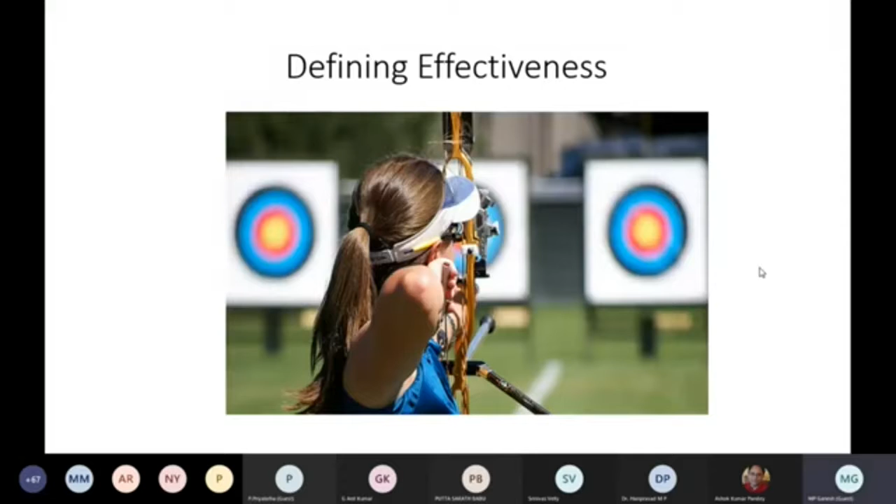Before we start, I would like to ask you a question: what is effectiveness and how is it different from efficiency? Like the picture says, effectiveness is achieving the right kind of goals, or achieving desired goals which are useful. Efficiency is achieving a goal with minimal effort, or the input-output ratio.

In this topic, we will first discuss under what conditions nonlinearity arises, and then discuss the methods used to solve such nonlinear problems. But before introducing those problems, I'll also talk about why we really need these solutions, since different types of methods are available. If time permits, I will also introduce some numerical methods that can be used for simulating these nonlinear systems.

I will show you how to obtain a frequency response of a Duffing oscillator, and demonstrate how to use Maple, MATLAB, and MatCont to get the frequency response of a Duffing oscillator. Then we will discuss the saddle node bifurcation in a microbeam, which is used for MEMS applications, and then discuss Hopf bifurcation, which is due to imperfection in the microbeam.

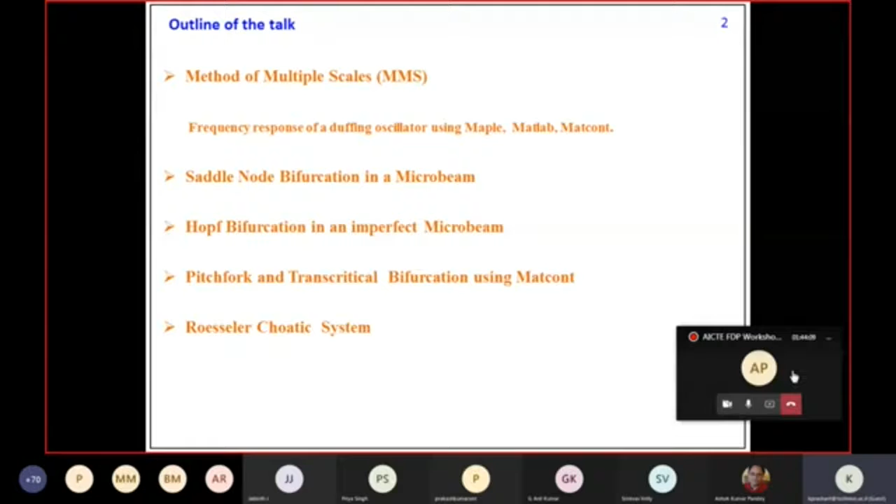And then we will see examples of pitchfork and transcritical bifurcation using MatCont. Finally, using phase plane, we will see the dynamic behavior of the Rossler chaotic system, and how it moves from a stable equilibrium to a chaotic system.

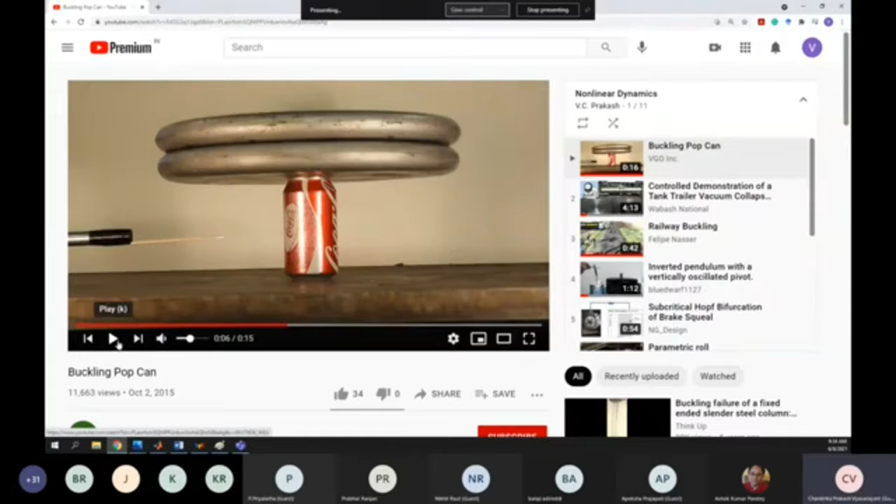So this is a Coca-Cola can, and what you see is that on top of it they have put a large amount of weight. Nothing is going to happen as of now, and the can seems to successfully bear the weight without collapsing. As I play the video, you see what is happening: someone is now probing it, meaning they are just going to touch it. It has collapsed with such a small disturbance.

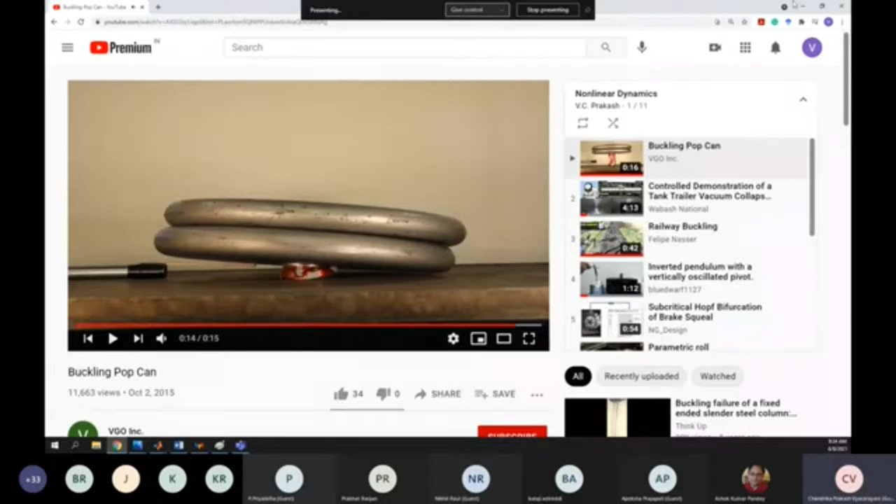So given that we have seen this video, let's approach this problem and try to understand how differential equations come into picture when studying mechanical systems.

I wanted to share some of my understanding on stability theory, perturbation theory, and nonlinear dynamics with all of you. Ashok told me a few days ago to speak on stability theory and applications of nonlinear dynamics and other things in fluid mechanics—how do we encounter it, and how do we solve those problems?

It's a beautiful subject, fluid mechanics, and it is beautiful—I use the word very carefully. It is beautiful not only from its appealing mathematical and physical side, but it's actually very beautiful to look at. I hope to share that passion that I have for the subject with you.

I have segregated my talks into three main topics. The first topic would be on stability and bifurcations. We will start with some very basic things. As I understand, most of you are aware of these things, but there are some nitty-gritties I might point out so we have a better launch pad for going to bifurcation theory and center manifold reduction. And some of the typical bifurcations, some mechanical system examples where these bifurcations are observed, and what are the mathematical characteristics of bifurcation, we will talk about.

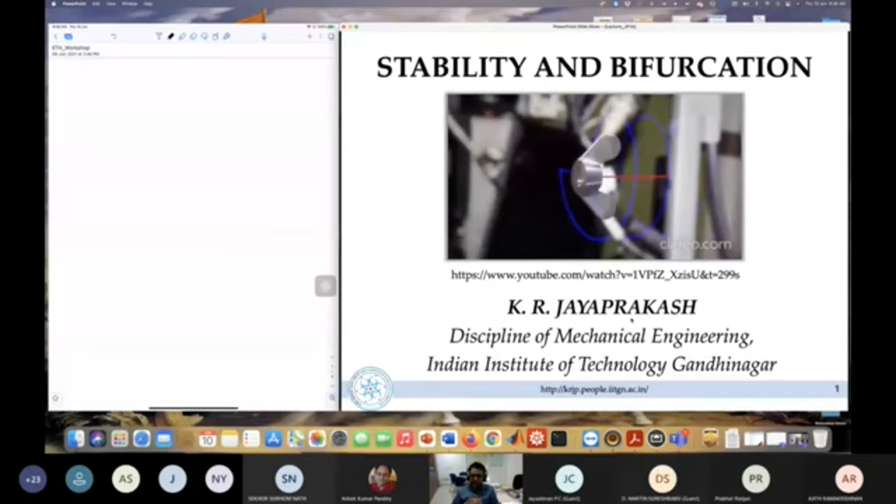More specifically, I will talk about something related to what is called the Sine-Gordon equation. When we talk about the Sine-Gordon equation, you have a plethora of solutions it can exhibit - it can have soliton solutions, breather solutions, and a traveling breather, stationary breather. The last topic I have set up is with regard to some aspect of granular systems, wave propagation in granular systems, which are usually strongly nonlinear or essentially nonlinear systems.

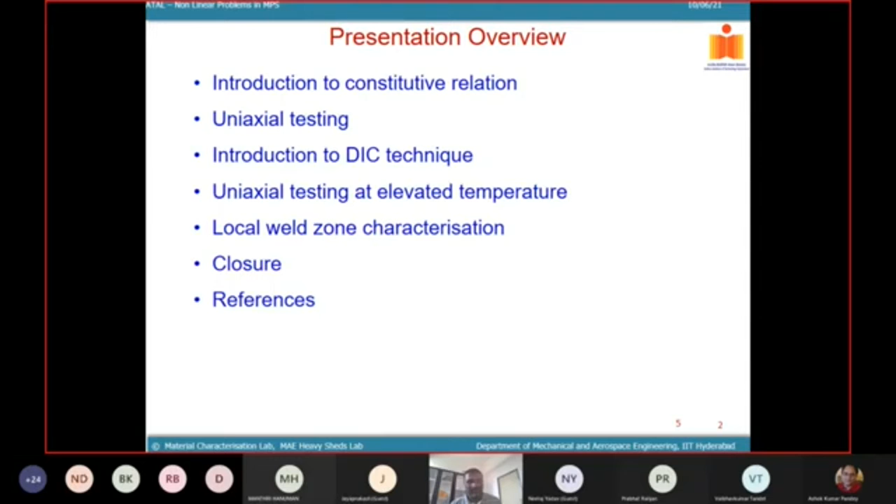I've titled it material characterization, both in terms of nonlinear and linear - it doesn't matter. This is what I have planned: introduction to constitutive relation, uniaxial testing, then a brief introduction to the DIC technique. Then how do you carry out material testing at high temperatures? And in case of weld joints, how do you get the localized properties within the weld zone? Then I will try to close it with a few remarks.

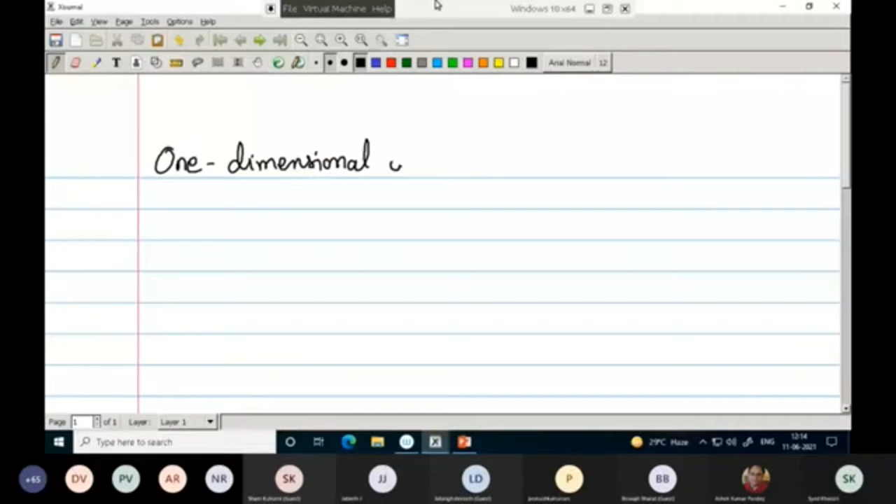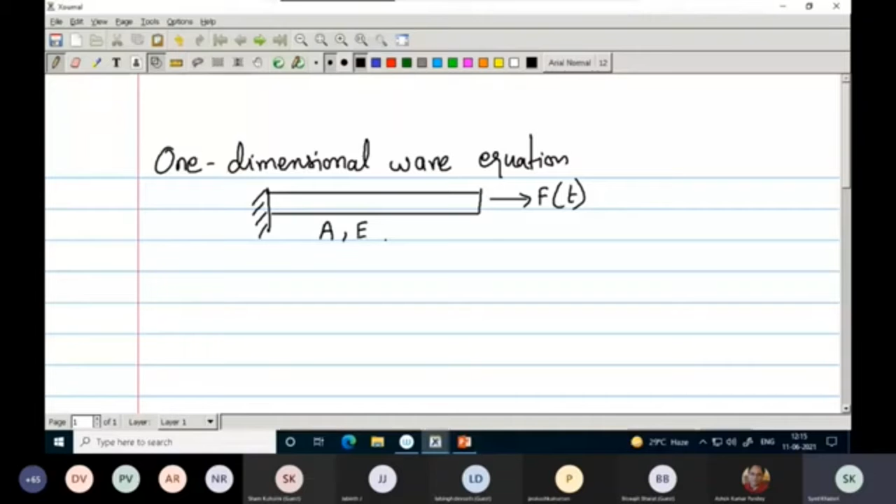One-dimensional wave equation - everything starts here. Let's say I have a one-dimensional bar, and at the end of it I am applying a force as a function of time. It's a one-dimensional elastic bar, so it will have some particular area of cross section, some particular elastic modulus. It's a one-dimensional problem, so Poisson's ratio is not going to be relevant here, it's not going to play much of a role. So what happens is that I want to write the equation of motion, the force balance for this particular problem.

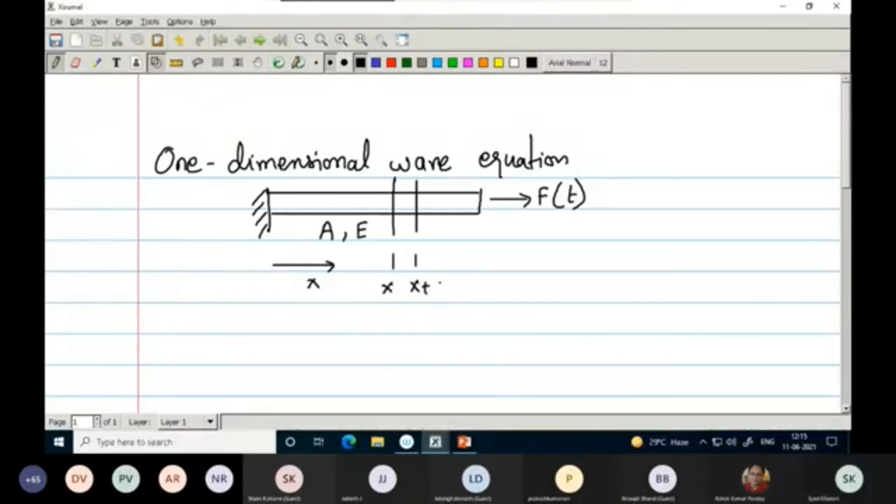So I can take two particular cross sections. Let's say this is my coordinate system X, and let's say I'm looking at two cross sections at a location X and at a location X plus delta X, and we draw a free body diagram for this one particular small chunk.

Sir, actually I am working in nonlinear dynamics. After this workshop, I came to know that frequency response curves are also used in different fields in mechanical systems, MEMS and NEMS. Those things I got new ideas about, sir. Dynamic - they used to give so many informations to us. Very interesting, the way they are taught and discussed are very interesting. Sir, this is a very informative session. I know about so many things about MATLAB and that software. Yeah, and your session is very informative.

First of all, I would like to say about this FDP that it was really marvelous. It's really great, thank you - as much as appreciation and interest for this FDP. I am from the Department of Physics, so all of these sessions were completely different to me because I could see everything from the engineering point of view. It was a good exposure for me. So I take this opportunity to say final goodbye to all of you, please take care of yourself and enjoy your life, don't be in stress. And I'm sorry that I just put you through this online business for the last 5 days. Please take care of your health. Thank you so much.